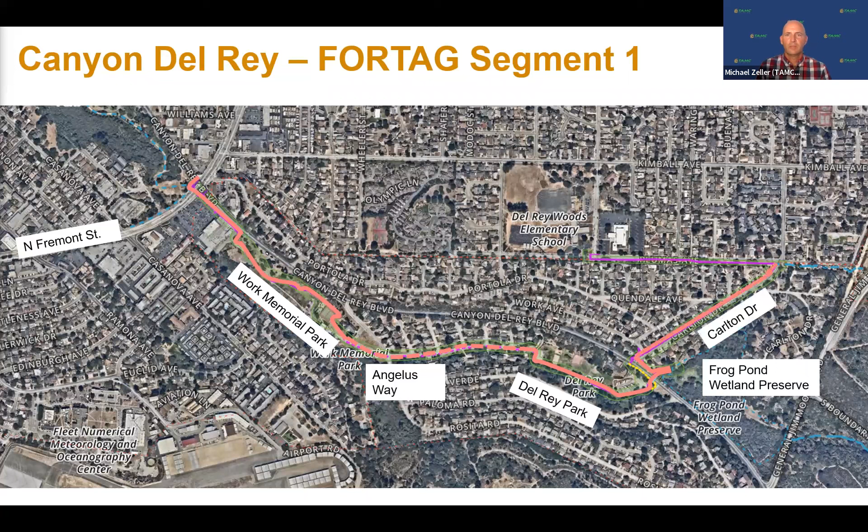The switchback brings us back up to Carlton, where we will run up Carlton to Plumas, and then the project terminates at Del Rey Woods Elementary School. So that's the quick overview. I believe on the next slide, we have a video that... I'm sorry.

One thing that we do like to say about this is that this is more than a trail. It's an investment in the community. I mentioned that we received a $10.3 million state grant to deliver this project. But the great thing about that is that we're not just building a recreational trail. There's so many more components to this project that provides a great investment in the community for Del Rey Oaks.

There's the Safe Routes to School component of this. So as I mentioned, the project will run up to Del Rey Woods Elementary School. We'll be providing bike racks, lighted pathways. There's educational opportunities, trash bins at key locations that we'll talk about tonight. It'll address safety issues at the Safeway driveway on southbound 218 by providing a dedicated right turn into the driveway. It provides stop signs on the trail, and it improves bike and pedestrian crossings at that driveway.

It's also a new way to interact with Del Rey Oaks. The project will provide a safe, accessible pathway that connects 7 local parks and recreational amenities such as the Frog Pond, Work Memorial Park, the new butterfly garden, and the tennis courts.

One of the things that we're really excited about is the facelift that we'll be providing to the tennis courts. The trail will realign and reorient the existing tennis courts, and we'll be able to restripe it for pickleball courts as well. The great thing about this is that it actually saves us money. We're able to save $26,000 in construction costs, as well as preserve existing trees.

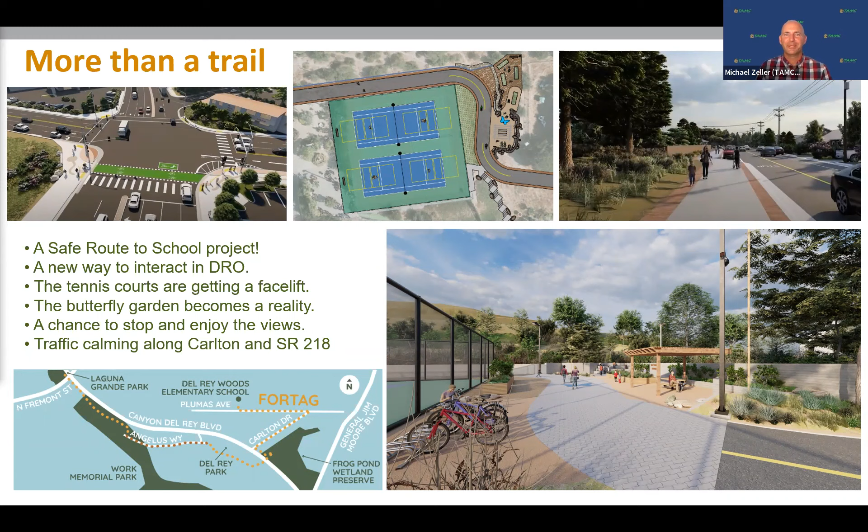And then also really important is just traffic calming along Carlton and 218, being able to make it safer, reconfiguring the roadway to slow down vehicles, add parking back on the west side of the roadway, all while adding trees and providing an entryway into the community. So with that, I believe that we're onto the video, and I'll hand things off to Lindsey to cover that. Thank you, Mike.

So hopefully you've seen some of this video, but if you haven't, I hope you will enjoy it. This video takes a walk through the trail and shows you some of the different features that we've been chatting about. First one, it'll take a look at SR 218 and North Fremont.

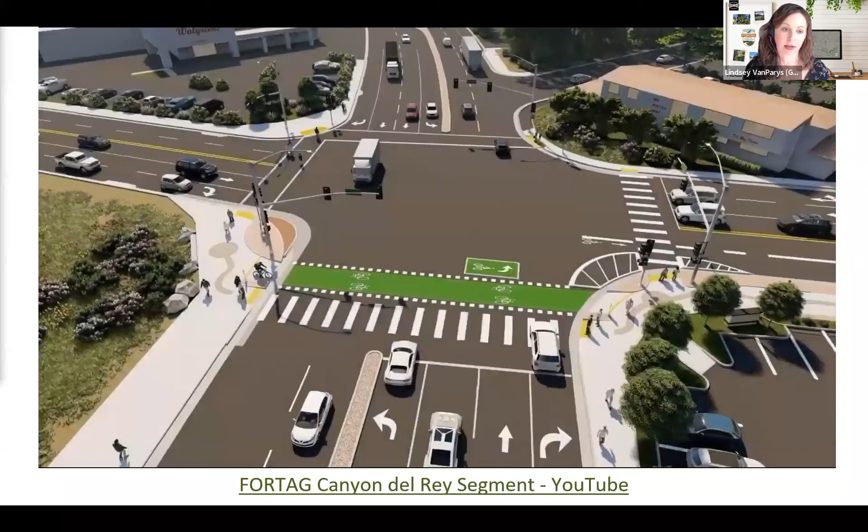And the reason why, for Canyon Del Rey, we are here tonight too is to ask for your thoughts and input on some of the amenities and the theme of the amenities that we're putting forward as part of the project. And so as you'll see, this intersection is really constrained and tight, but there's opportunities to provide some placemaking using decorative paving in the sidewalk area.

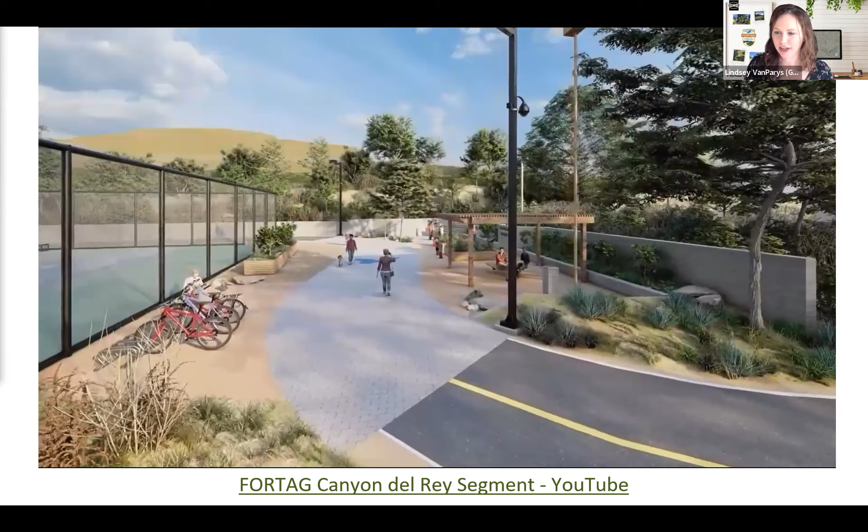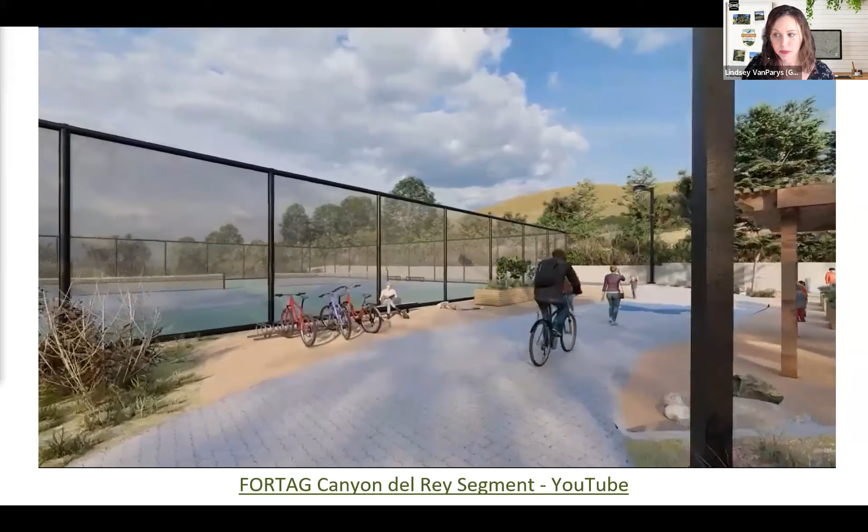And then as we go into the butterfly garden, this really provides a wonderful permanent space for all of the wonderful things that are occurring at the butterfly garden, including a gazebo for some shade, some bike racks. So the bike racks and all of that is what we're asking about tonight. The planters and the wall texture is something that we're also going to be looking at updating and getting your input on.

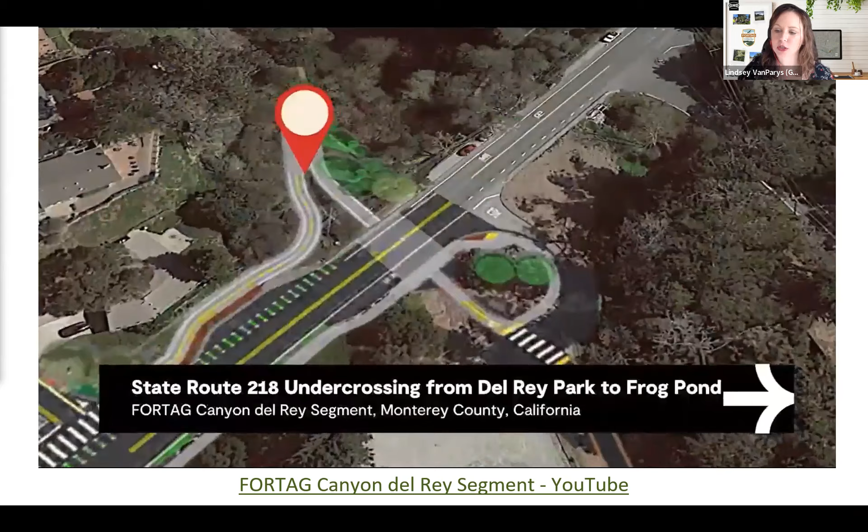Now, as we jump over to State Route 218 and the undercrossing from Del Rey Park, you'll notice that these walls that you're going through under the underpass are blank, and those are a blank canvas. So we are looking at the opportunity to add some potential artwork, whether that be through stamped concrete, murals, painting. There's really a lot of opportunity here to customize the various engineering aspects and really make it tie into the community.

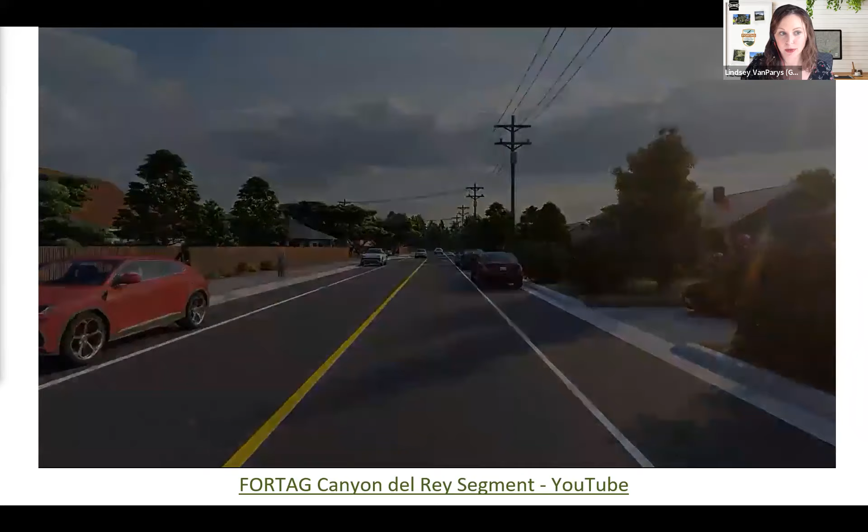And then this is Carlton at 218, where Mike was talking about reactivating this space. So if you can envision where all of the sidewalk is, it's all pavement, big wide pavement. And so this is allowing us to narrow down this intersection, which will reduce speeds and improve safety of that crossing. And then as we head up Carlton, we'll be pushing things to the east side of the road, taking out those parking bumpers and the green paint and really providing that Class 1 space.

And we worked very hard to find the balance between adding in pocket parking where we can on the west side, but also pulling the trail away from the private properties and using the landscaping there as a buffer, also maintaining all of those existing beautiful trees. So that is our video.

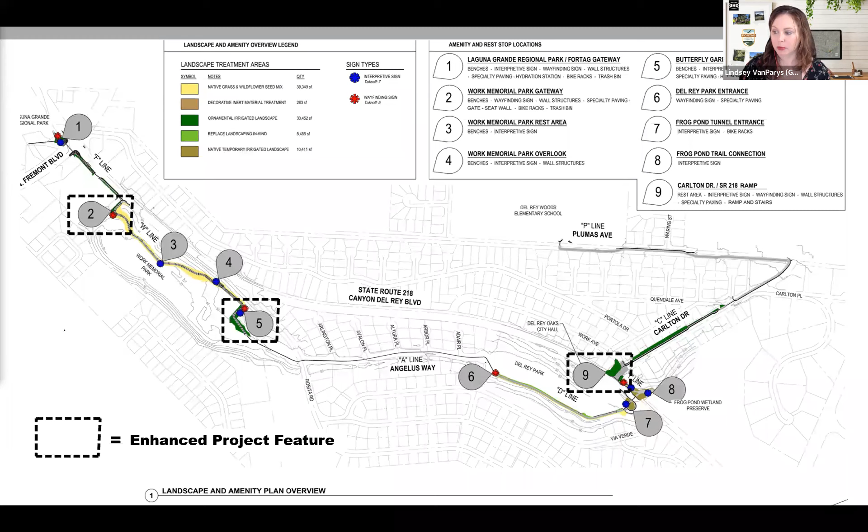6 is the entrance to Del Rey Park. That will be just a wayfinding sign because that's where the trail picks back up. And then 7 and 8 are opportunities to have interpretive signs. And at 7, as you saw in the underpass rendering, we've got some opportunities to put in some bike racks as well, and potentially other amenities.

So as I step through, first we have the modern theme. So these are more modern feeling textures and pavement patterns. Again, to reiterate, if this is the theme that you prefer or that you like, that doesn't mean you're going to get a retaining wall with leaves on it. It's just that look and that feel that we're going for.

So it would be that more flat, classic, modern retaining wall with the potential to add in some Del Rey Oaks appropriate stamping and patterns along those walls. And same with the railing and the fences. It won't be this exact, it's just that look and that feel.

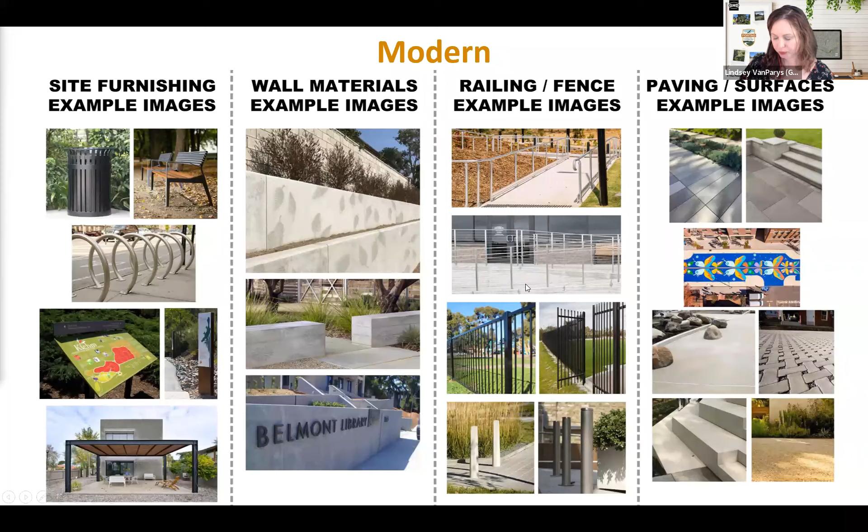So diving into rustic, this theme uses more natural looking materials, woods and corrugated metal, and really just provides more of a rustic natural feel. Again, the retaining walls, those material choices look a little more natural and historic. Then we've also got different mosaic options.

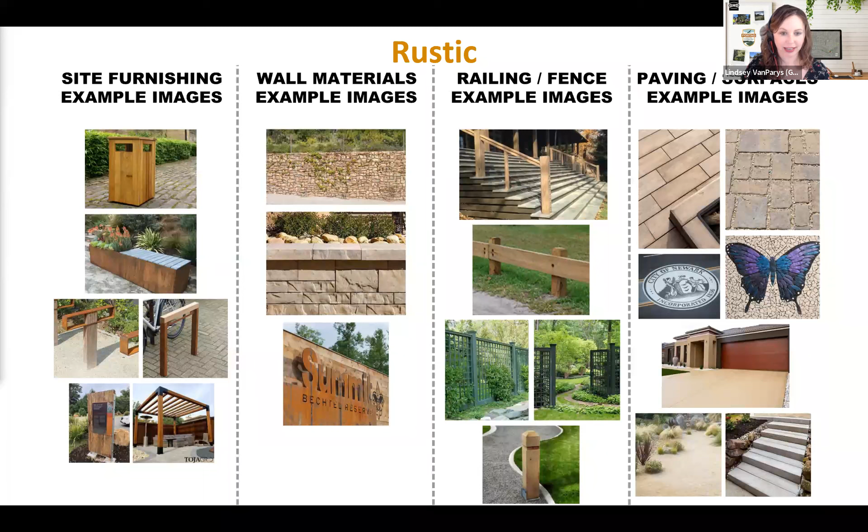And then the city of Newark, that is just a stamped thing on the pavement. And we are going to be stamping the FORTAG logo on the trail surface. So you can use that as a sense of wayfinding and know where they are and what trail they're on.

And lastly, our coastal theme. Our coastal theme is really a combination of both modern and rustic. It provides a sense of being at the coast. You'll notice waves, boardwalks, sails, and on all three, you saw kind of the shade structure. We are proposing a shade structure at the Butterfly Garden. There aren't any other shade structures that are proposed along the corridor.

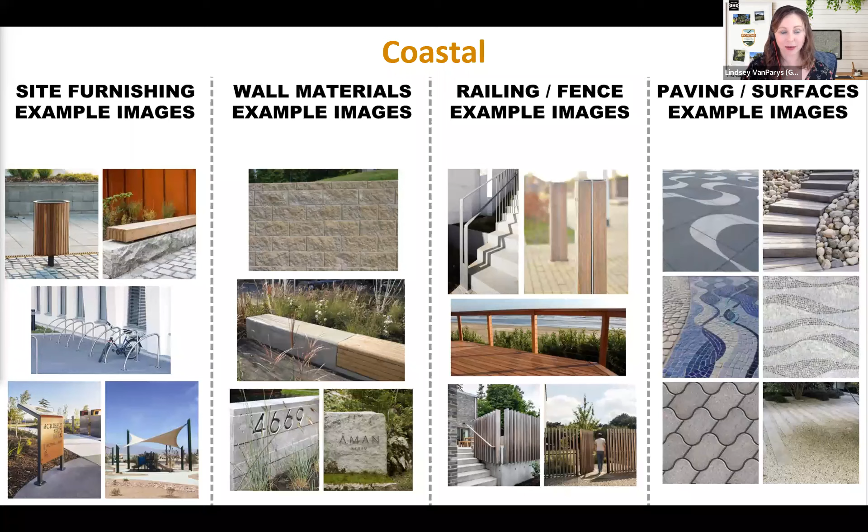And then the railing is needed for ADA compliance. And so anywhere where there's a drop off or a hill of a particular slope, we need to provide railing so that it's accessible to all. And now with that, I am going to enter our next interactive question.

And Karen, before you put that up, everybody, if you can move the poll question around, I'm just going to switch to this next slide, which lays them out side by side. It's not the whole boards because you couldn't see them if I laid them out side by side, but it just gives you a rough example of what we're looking at. So put your preference and let us know what you think.

And while you're putting in your preferences, I do want to say how we are going to use this is we're going to take your input and go back to our internal team and kind of look at where these implementations make sense. Where does it make sense to put in a trash can or a bike rack? And we do have a lot of those identified already, where we're going to provide benches versus seating nodes. And a seating node will be kind of a decorative wall. So a seat block, you should say.

Karen, how are the polls coming in? Oh, wonderful. So thank you very much. I see we've got coastal and rustic. Wonderful. Thank you, everybody, for your input on that.

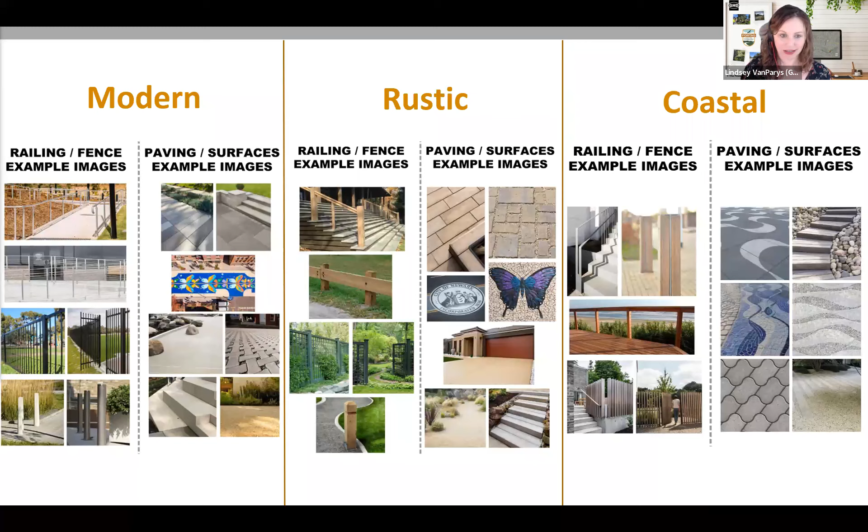Now, what to expect next. We are going to use your input and the project team will finalize the design and incorporate the amenities throughout the trail. Be on the lookout for project update mailers and e-blasts. We will be sending those out periodically to provide an update on where we are in the process. I know sometimes this final engineering thing can seem long and drawn out, but I promise we are working hard in the background, navigating all of the challenges that come with putting in a new infrastructure along a built environment.